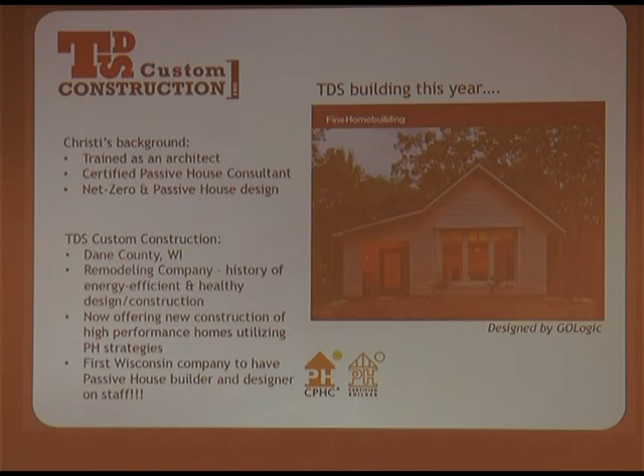So passive house, it's two things really. It's a standard for certification, but more importantly, it's a methodology, a set of strategies that when they come together make something really great.

But that's just about the standard, the certification, and how low you can get. The next part is the methodologies. It's really important to understand that this is an integrated system, that you can't sacrifice one for the sake of the other. You need to have all the parts and pieces operating together in order to get these really drastic energy use reductions.

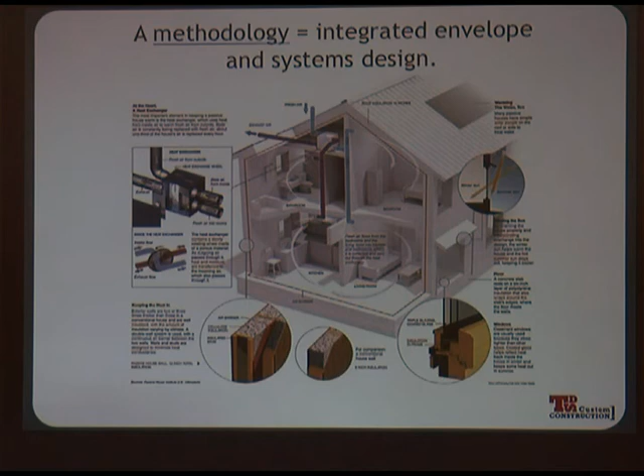First, I don't know how much people know. Has anyone heard about passive house before? Okay. I don't know if any of you have heard these misconceptions, but these are the ones I often get. People ask me at the first client meeting, can I have windows? Yes. Or windows that open? Yes.

So I like to run through these really quick just to put any of these myths aside. Too tight, that's the biggest one I get—I got it from a yoga teacher just yesterday. I'm always explaining that houses do need to be tight in order to conserve energy, but we inside those houses need to breathe, or any building for that matter. Her concern was mold and mildew issues. So what you have to do when you tighten up a house is introduce continuous ventilation into the house, and we're going to talk more about that later.

It doesn't work in my climate—that's not true. It works in any climate all around the world, from the hot, humid climate in China to the northern, really cold climates of Asia and Alaska. Is it the same thing as passive solar? It is not. We'll get more into that later.

That you have to use certain building materials—that's absolutely not true. You can use any of our standard construction building materials, or you can use alternative materials. It's not about telling you what materials you can use, it's about a way of building.

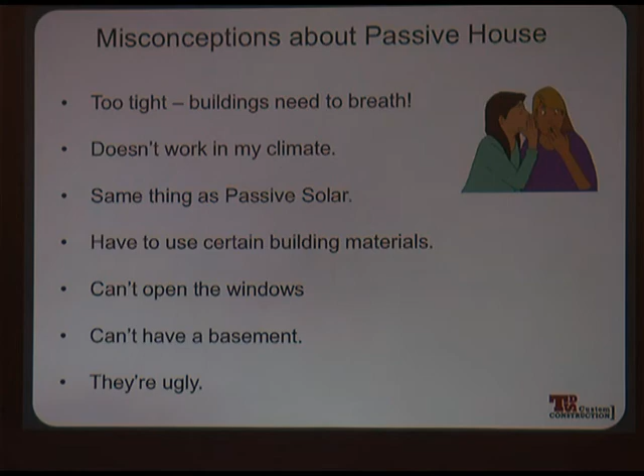I think a lot of the passive houses I've been seeing over the last decade or so are quite beautiful. They're not ugly. I think a lot of people think about passive solar and what was happening in the 70s and early 80s, and some of that stuff was a little bit kitschy—a little bit unappealing to the eye.

But nowadays we're seeing things that are much different. You can advance it—this is the kind of thing we're seeing. So it's really not unfamiliar at all, right? It's the kind of thing you'd see in any neighborhood, anywhere in the country.

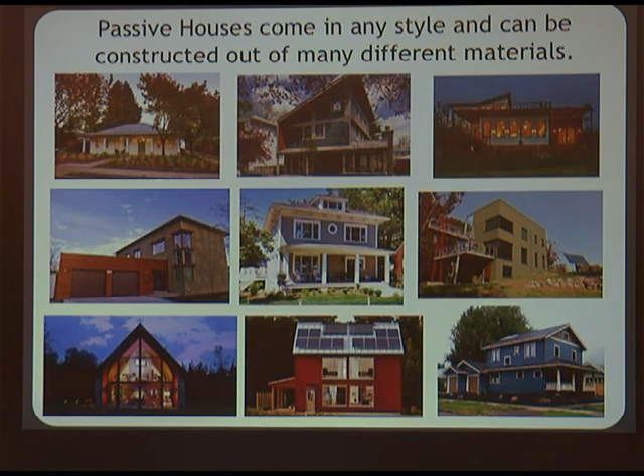And there's a lot of different styles. You kind of have a more contemporary one up in the upper right. You have maybe a southwestern style, although this is in Wisconsin right here, and then sort of more pared down, minimalistic things. Oh, that one is the southwest, the Wisconsin one's over there. And then very conventional styles. So it can be done in any style, so you don't have to be limited by that.

So the benefits—I like to go over these first, because if you have just one minute in an elevator with someone, this is like the elevator speech you want to give to convince people this is the way you want to build: vastly reduced utility bills.

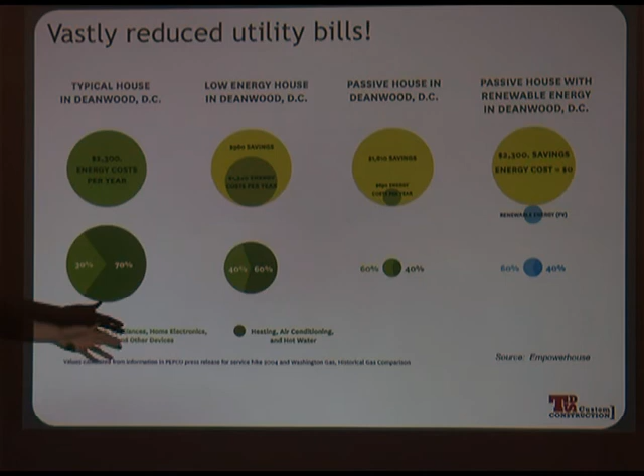I like this slide because this is an example of a house in the District of Columbia, but it could be anywhere in America. Typical energy costs here, what you'd get if you have what you might call a low energy home with really good upgrades, but not quite to the level of passive house. Much more energy savings and cost savings on that third line when you hit passive house.

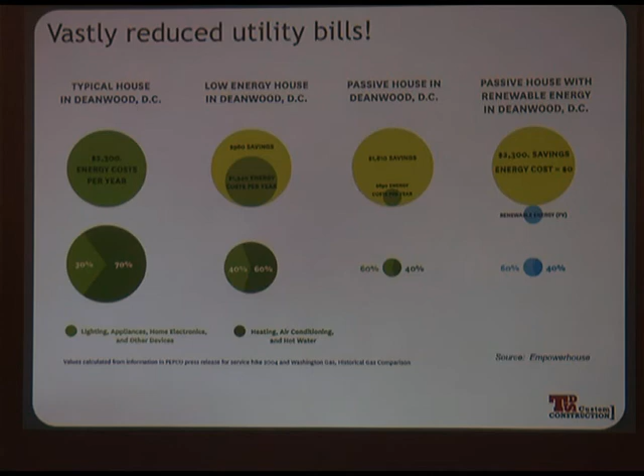And then when you add a small amount of renewables to a passive house, you're looking at net zero—you're looking at paying zero for your utility bills. We'll get a little bit more into that as well.

I have an old house that I would love to be able to upgrade at some point, but you put your hand on the wall in the middle of winter and it's cold. You don't put your bed next to an exterior wall because you don't want your back up against that. You don't have that in a passive house—all the exterior walls, when you touch them, feel good. They're not cold to the touch.

And because of that, you also don't get the drafts that you experience in your windows. You don't get all these cold spots, lots of condensation buildup. You're not seeing that kind of thing in a passive house, or something built to passive house standards. You're not getting the drastic temperature swings, because a passive house has such high amounts of insulation it can handle those extreme temperatures we're definitely experiencing here in Wisconsin.

The first net zero house I designed was in Minnesota, so very cold, climate zone 6, like here. And they didn't even have the heating system installed when they first were constructing it. I went in there and it just felt so amazingly good, and I was like, oh, you already have the heat turned on? And they said—even I was getting used to this idea of how different it was—they said no, we haven't even put it in, the heating system is in boxes in the garage.

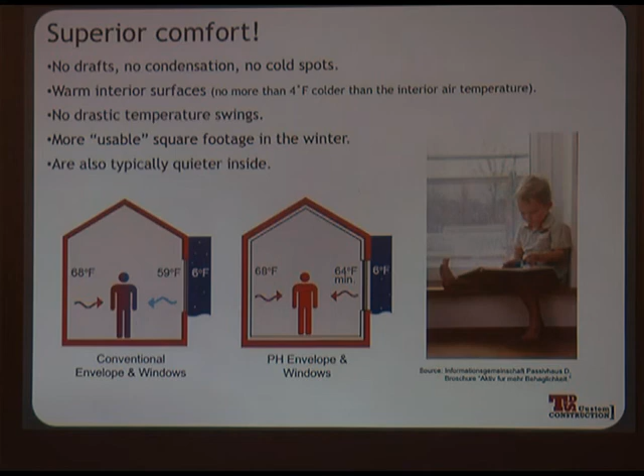Superior, healthy indoor air quality — this is what I was talking about before. We've tightened up the house, but we're inside of it and we need to breathe, we need fresh air. We don't want fresh air coming through all those cracks anymore, because that's kind of weird, dirty air. So we've tightened it up and made two holes in the house, one for in and one for out, and we have constant ventilation air. It's not blowing on you like a furnace does — usually that's high velocity and kind of uncomfortable. This is just a trickle of fresh air constantly coming into your home.

So you have reduced allergens, reduced pollutants, lower CO2 levels — there's a study, buildequinox.com, that's been doing a lot of research on indoor air quality and how it affects our cognition, our family life, our work life, how we're able to function, and our general health. If we're living in these spaces, it can really affect how well we operate day to day. A passive house will provide that quality of indoor air.

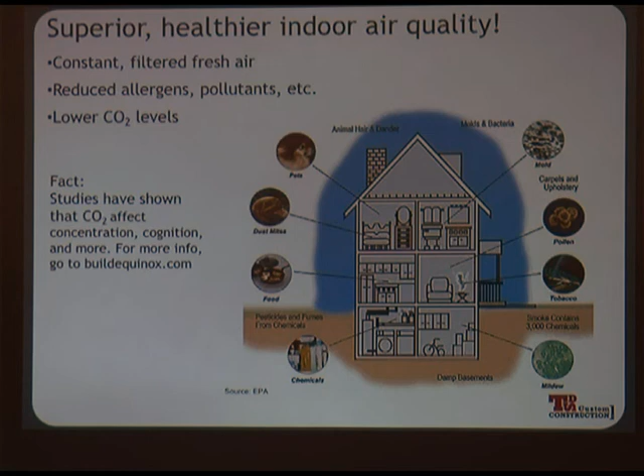Energy efficient homes have higher values. I think there still need to be more studies on this, but there are some out there showing that if you have an energy efficient home — maybe it's LEED certified or Energy Star — if it's better than the status quo and you can put that on the sell sheet when you put your house on the market, they sell for more money, and they also sell faster.

Okay, so let's talk about why we're here, why everybody is here — thinking about climate change. And where is Passive House and net zero in that context?

This is the latest research from the Energy Information Administration. There's tons and tons of data online that I completely got lost in last night, but this is the one you really want to know about. Buildings are responsible for around 40% — depending on the study, maybe even more — of our energy use and CO2 emissions. Of that, residential is about 21% of the total, so about half of what buildings use is residential. So it's not chump change — we can definitely have some impact here.

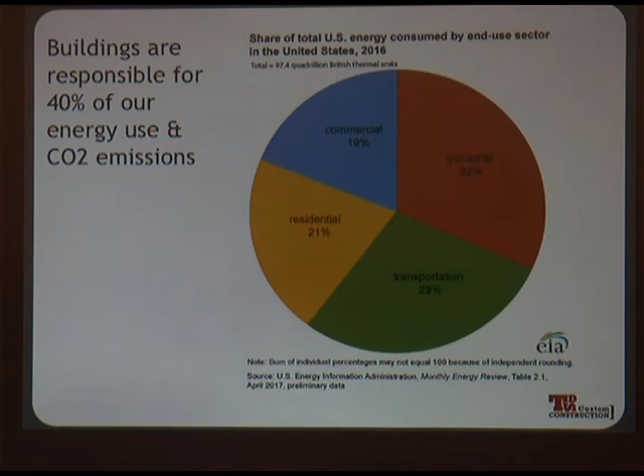The fact is that what they're projecting for our energy use, globally and in our country, the curve is amazing — it just keeps going up and up and up. We know that level of energy use is just not sustainable into the future. We've already gone so far, we have no idea where that arc is going to level out, or how that's going to affect us. So we need to really do something about this, and Passive House can be a major player in helping bring down that almost 40%.

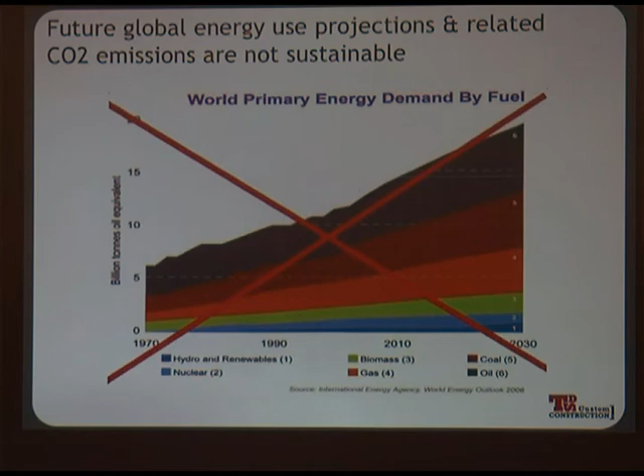So here it is — this is what they're projecting, our energy use going up and up and up. And showing all those different colors — not the red, but all the others — that's how they're projecting where we're getting our energy from into the future. You can see only a small part of that is going to be renewables. I mean, these are projections, but in order to close that gap, that red part — if we're using X amount of energy and we only have enough resources to supply this other amount — it's about closing that gap with conservation.

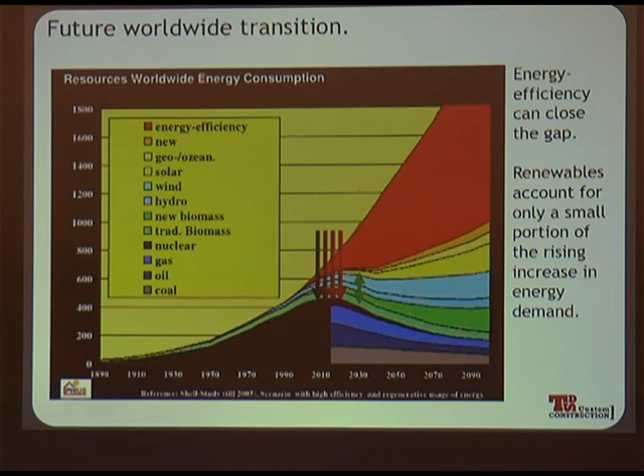And remember, that's what Passive House is all about — conserving energy first. That's going to be a recurring theme throughout my talk tonight. So since the energy crisis, this is what we're seeing.

We had a standard for energy, and all the codes have sort of stepped down incrementally, little bit by little bit over time. The newest energy code, well, it's actually not the newest anymore, but the 2012 IECC, which we're not on yet here in Wisconsin, that was a pretty big jump.

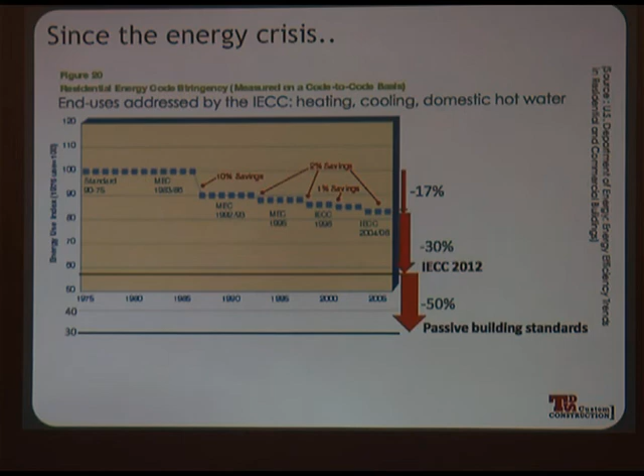So passive building standards are taking that next leap forward. I'd like to put this chart up here. I think this gives more context for people for understanding how this all fits together.

So the home energy rating system, it's the HERS rating. Has anyone ever heard of that? Okay, so if you ever sell your home and you have an Energy Star, or you've done a blower door test, or some rating for your house, that would be the HERS rating. There's a lot of people throughout the country trying to figure out how to get that listed on every sell sheet. Those are mostly real estate agents, lenders, and appraisers—that's a whole different topic of conversation. But the HERS rating basically compares your house, or any house in question, to 100, which represents current code. So what we have here is, you know, my house maybe is up here.

I don't know, I'd like to change that. 100 is code, and then it steps down from there. So you've heard of Energy Star, heard of Green Built Home probably. You've heard of LEED. 2030 Challenge is another thing, and there's all these targets. You can see how much further down Passive House will put you. Zero is that place where you've achieved net zero energy.

So it's just another way of looking at this, just to impress upon you that the Passive House strategies are achieving deep energy reductions. Not just a little bit, not just cherry picking, but we're going all the way, or as far as we can go, with conservation strategies.

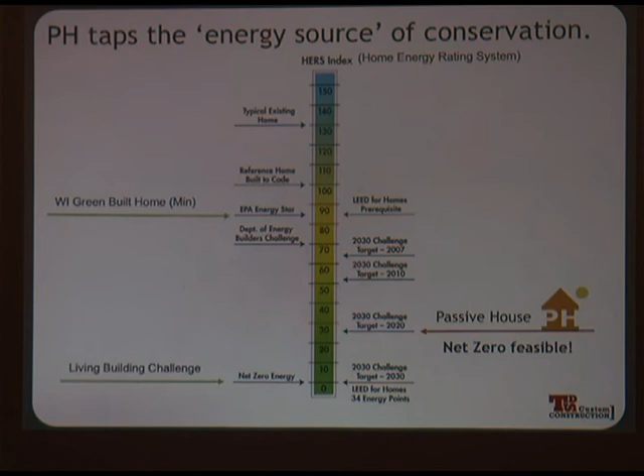Brief history of Passive House. We're gonna have a history lesson, I'm sorry. You have to know where this has come from, because there's sort of a sense of pride, for me anyway.

Passive House actually has its roots in the US and in Canada. Most people think of it as something imported from Germany, but all of the research started right here, actually, in the upper Midwest and in Canada. It was in response to the energy crisis in the 1970s that all of this research came about.

So things like super insulation, increasing air tightness, even some of this passive solar stuff, ERVs—energy recovery ventilation, which we'll get more into—all of that kind of stuff came out of research that was done here. I have to say, it was at the University of Illinois, my alma mater. Oh, I didn't realize that part.

But then a lot of those ideas sort of went by the wayside. Political climate changed, economic climate changed, a lot of different things changed in the 80s, and some of these ideas were forgotten. There are definitely some people who never forgot these ideas, and now we're seeing a resurgence of looking at these things because climate change has become such an issue, and it's really obvious and apparent.

But in the meantime, this guy, Wolfgang Feist, got a hold of these ideas, and he said, what a good idea, Germany could really utilize these ideas. What can we do with this research, and what can we do to really reduce the energy consumption of our houses in Germany? So they developed what is called Passive House.

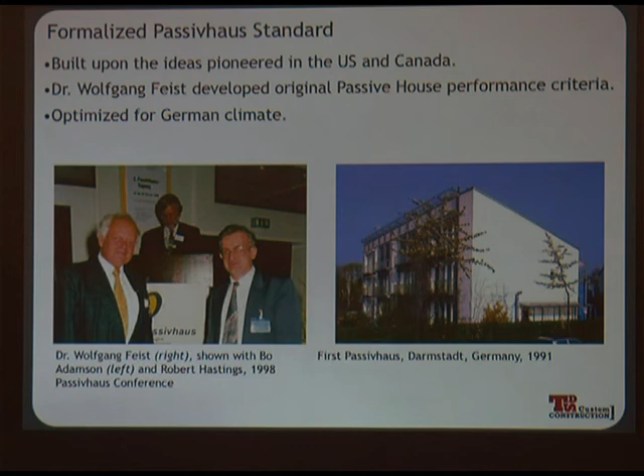So it came back to the US. We have several bodies of certification here, well, two, I should say. The Passive House Institute in Germany is still certifying globally, but what I prefer is Passive House Institute US, because they're really on the ground here working very hard to make this come to fruition in our country.

And they're tailoring it for our country. They're working with the Department of Energy. They're working with other key players in the building science community. They are doing things like working with manufacturers to get more and better doors and windows available to us, working with ERV manufacturers to improve technology. So they're really on the ground trying to figure these things out.

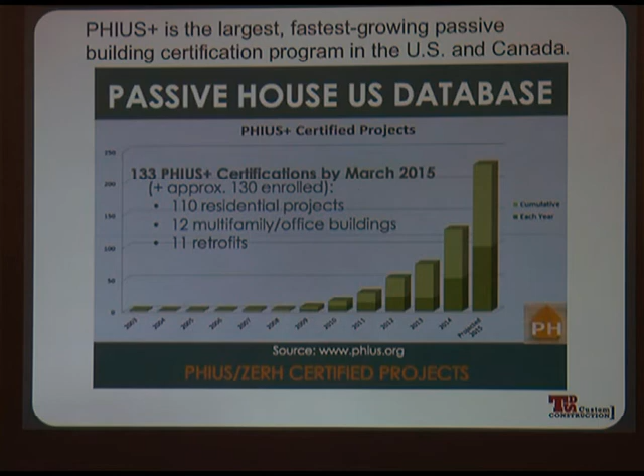And it's growing very, very fast. They've seen a huge increase over the past several years. You can kind of see that curve going up of residential, single-family residential, but now multifamily residential people are catching wind of this.

I mentioned the partnership with the US Department of Energy. I think this was so key and so great for Passive House Institute US to do. The Department of Energy regulates Energy Star and the Building America program, and now you may know about the Zero Energy Ready Home, which is also a really great program. Basically, it's getting you to fairly deep energy reductions, but not quite to zero. With a small amount of renewables, you can get to zero, but it's still not quite the deep energy reductions you're getting with Passive House. So they've created this partnership, and the Department of Energy sees this as the next REACH standard. They're on the Zero Energy Ready Home now, but they see Passive House as being our future.

Okay, so let's get into the methodologies. It's a conservation approach. It's about reducing your loads first and maximizing your gains. So minimize losses, maximize gains. That's the tenet of Passive House.

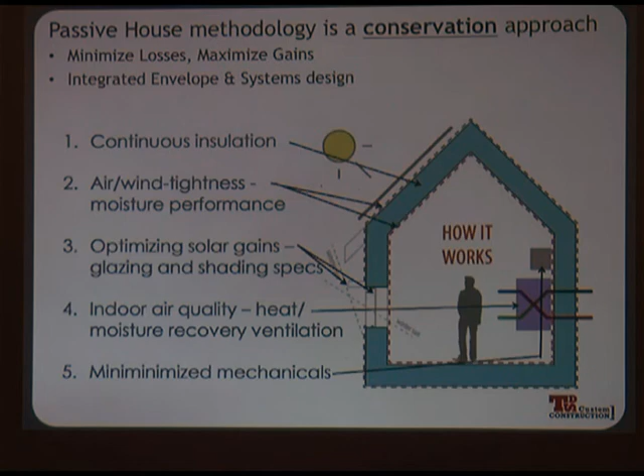Before you put in any fancy technology, before you're looking at renewables, you're talking about a house, and I think this is how I frame the whole idea of passive, that it just passively resists the weather. There's not a whole lot of active technology until you start adding things like PV. So the 5 basic strategies working together as a passive house: continuous insulation, high level of air tightness, optimizing solar gains—that's the passive solar strategy—energy recovery ventilation, and small loads, small mechanical systems.

Just to help you through this, because people will ask—oh, I work with passive house—and they're like, oh yeah, passive solar, cool. And I'm like, yeah, but it's not quite the same thing. Passive solar was all about mass and glass, which isn't aesthetically appealing to most of us nowadays. It was sort of a way of the past, but the reason it got that way is because it was all about having a lot of concrete or something massive inside to absorb heat, and then a lot of glass to let that heat in. Really what happened was you got big temperature swings—overheating during the summer or even spring and fall. You'd have all this heat loss through the windows because we just didn't have the windows then that we have now.

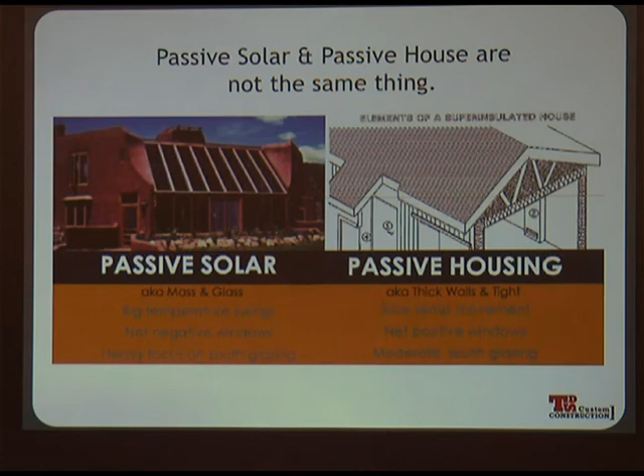Passive house versus passive solar is different. You don't see the levels of windows on a passive house that you would in passive solar. There's that slow temperature movement, so you're not getting big drastic temperature swings. You're not losing lots of heat, you're not gaining tons of heat. It's more balanced.

Okay, so let's talk about continuous insulation and the thermal envelope. When you think about continuous insulation, I like to think about it in terms of nature—we can learn a lot from nature. So there's this bird, just walking around, they're fine, it's summer, they're comfortable. But they have a layer of down all around their body that when it gets colder and colder, they're able to pull into, and their body is completely surrounded, with no gaps in this insulation that they carry around with them. That's what we want to do to our buildings.

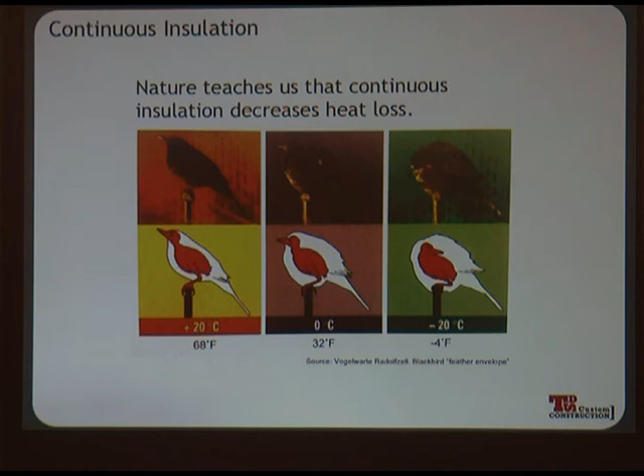Not a bird, but same concept. You should be able to take a pencil—if you cut a section through your building, cutting it in half and looking at it from the side—you should be able to draw all the way around the building without picking up your pencil where that continuous layer of insulation is. If you have to pick up your pencil, then you know that's a detail you have to look at, a problem you have to solve.

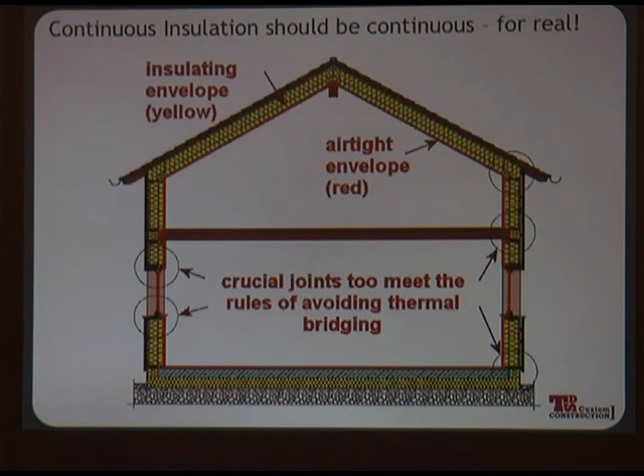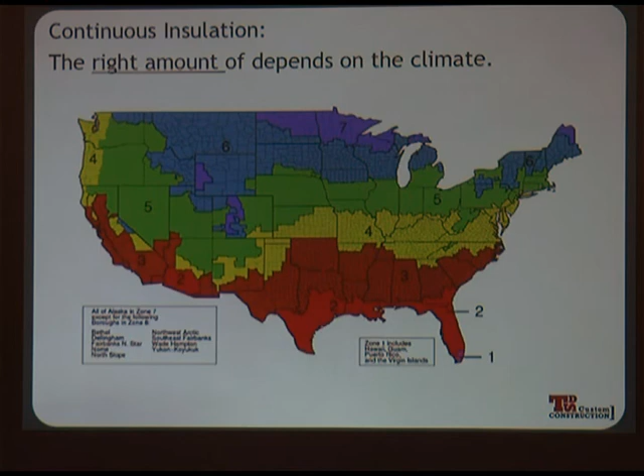I think we'll just zip through this one. So what is the right amount of continuous insulation? Because you actually want quite a bit—more than what we have—but what is that? It really depends on the climate, and on your energy balance. We use energy modeling software to figure out what the ideal is, both in terms of cost optimization and in terms of what's best for the climate.

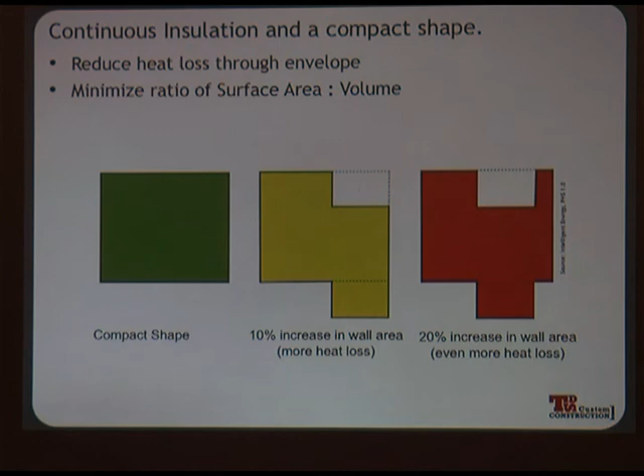What has become very apparent over the last 30 years of research is that a compact shape is usually best. So this square, right? The more convoluted you get, having corners taken away or courtyards and things like that, the more heat loss you're going to have through your envelope. So that makes for maybe a kind of a boring looking building, but we're going to discuss later how you can take advantage of things like shading to sort of articulate the facade a little bit more and make it more interesting.

A key part of continuous insulation is eliminating thermal bridges. Do people know what thermal bridges are? Okay, so you two have all the answers. So basically, it's something in the wall or the floor or the roof that's conducting heat through the assembly of the building.

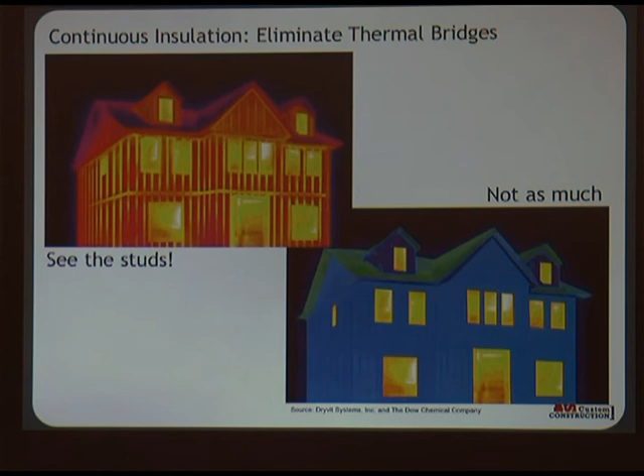We don't want that. We want continuous insulation. So this building was actually retrofitted, not to passive house levels, because you can still see the studs sort of projecting through on the lower right. But just by adding some continuous insulation on the outside of the building, you've drastically reduced thermal bridging and you've drastically reduced your heat loss through the envelope.

Can you go back one, actually? So I just want to mention that when you have a thermal bridge, especially in houses like this, you have the tendency to create mold issues, because that stud or that thing projecting through your envelope can get really cold. Then you can have the warm moist air of the inside of the building hitting that, and condensation occurs. Many of you at some point in your life have seen this on windows. So if you have a wood window and there's condensation on it, the window starts to rot or decay or do things that you don't want. Well, this can happen in any part of our building assembly. So that's another reason why thermal bridging is so important to eliminate.

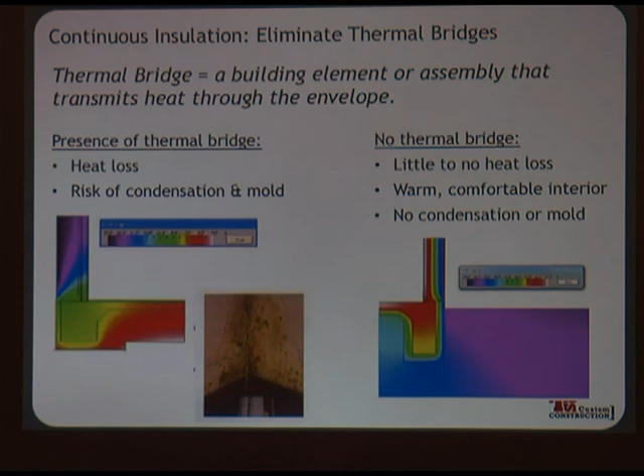You can go to then. Let's see, what am I meaning to say here? So the foundation connection is usually the trickiest. It's that place where you have this highly conductive concrete meeting other parts of the building, and you really have to think through how this is going to be detailed and how you're going to eliminate the thermal bridges. So this is just one of many, many, many solutions to this problem.

I've seen a lot of passive houses throughout the country that have said, we're okay without a basement, we're just going to have a root cellar underneath our connected garage or whatever that may be. And they'll do this bathtub foundation. In this case, it's a little bit different, but it's basically insulation that's wrapped up on the outside, goes underneath the concrete slab, and then comes up again on the other side. That's probably the simplest way to reduce thermal bridges, but I'm aware that we live in tornado country. I've never personally designed a house this way, but just know that's probably the most complicated detail there, where the foundation meets the wall.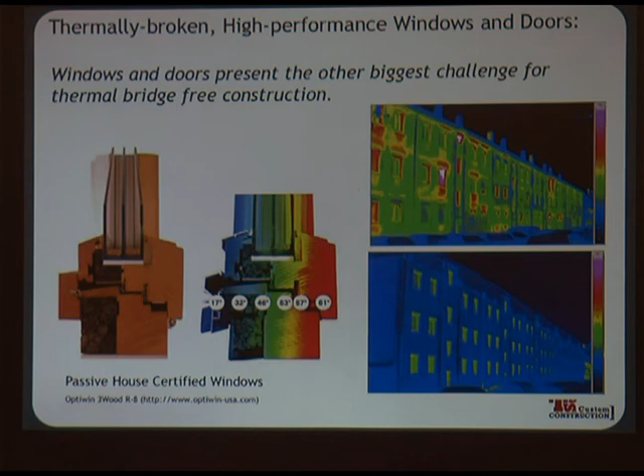The other thing to watch out for is solar heat gain coefficient. In the past several years, the incentives for buying windows that were Energy Star certified mistakenly and unfortunately were really focused on the South. You want to reduce your solar heat gain coefficient, which is how much heat is getting into your building. So if you have a 0.5 solar heat gain coefficient, that means 50% of the sun's radiation is getting into your building through your windows. That's about where we want to be for this climate. But all of those certified windows we were getting tax credits for were looking at much lower solar heat gain coefficients, which makes sense, because in the South, you don't want that coming into your house at all, since it's hot and you want to keep it cool.

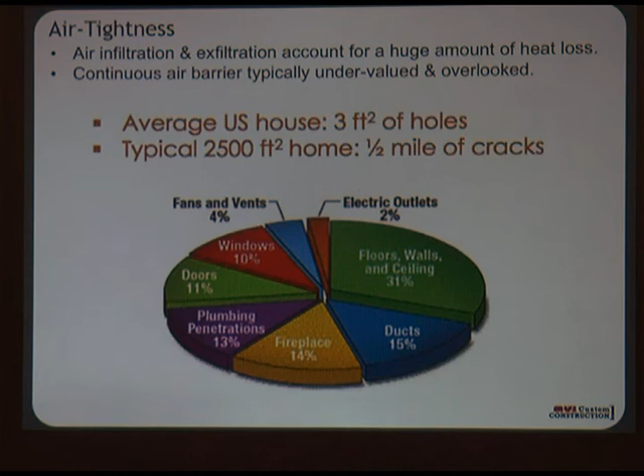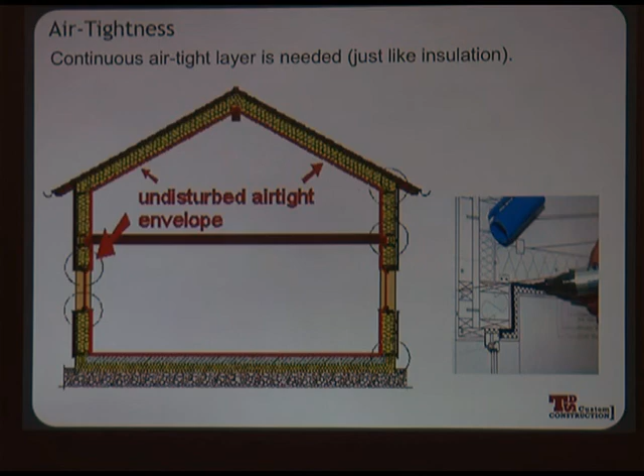Continuous air barriers are typically overlooked. So just like with that thermal envelope, you want to be able to put your pencil down on a piece of paper and draw where your air barrier is. If you have gaps and you have to pick up your pencil, then you know you have an issue you have to look at. I know I sound like a broken record, but these two things are so incredibly key to the performance of a house like this.

Air tightness, yet again, as we talked about with thermal bridging, can happen the same way: moist, warm air starts to travel through your wall and hits cold surfaces. You can have risk of condensation and mold, which you do not want, because that's sick building syndrome. The occupants inside can get very sick as well.

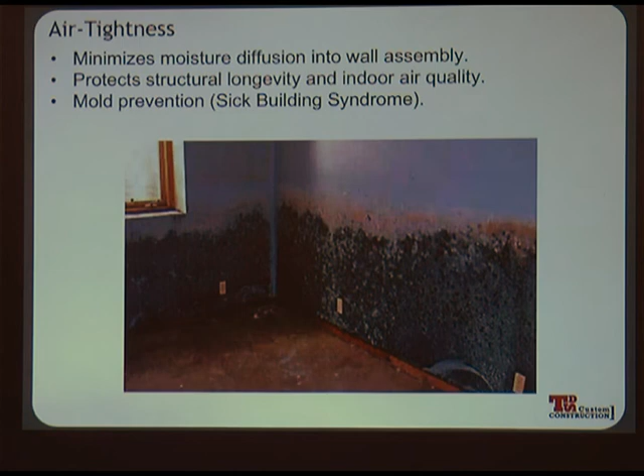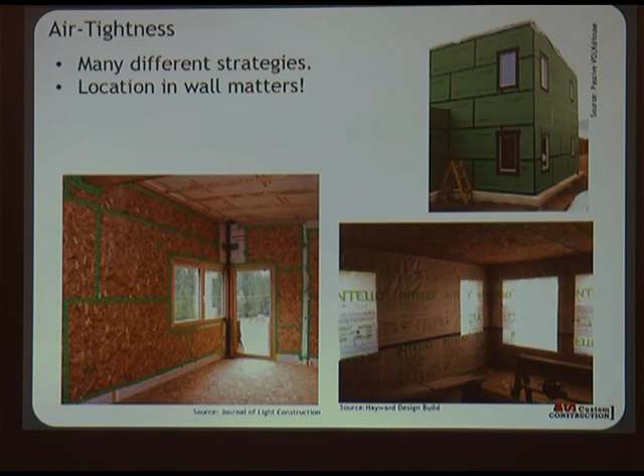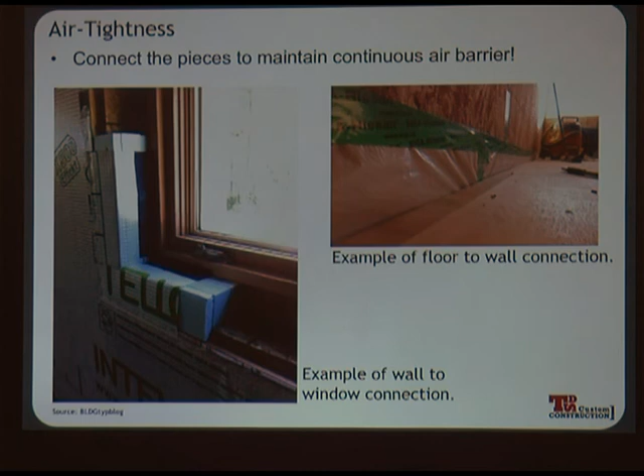It's really important to look at all the different connections. The crucial ones are where the foundation or the floor meets the wall, and where the airtight layer meets the window. We know our windows are airtight—we just looked at that—and we know our wall is airtight—we just looked at that. So how do you connect them? This is one example an architect came up with: wrapping this membrane up and connecting it to the window frame, so that key area where you're always having leaks and drafts around the frame of the window is now sealed up tight.

At the first net zero house I designed, they did the blower door test and they were bummed because it really wasn't very good. They thought it would be much better. Their goal was 0.6, but they were coming in at like 1 or 2, and they weren't meeting their goal. Then they realized it was one vent they didn't seal up, and they sealed it and got their goal. Actually, they got to 0.3 for air tightness. So it's really important to seal up all these penetrations. Even one little hole in this envelope that you've done such a good job sealing up can make such a big difference.

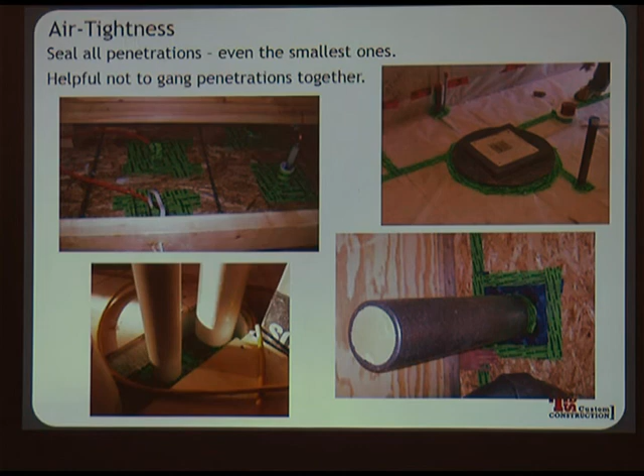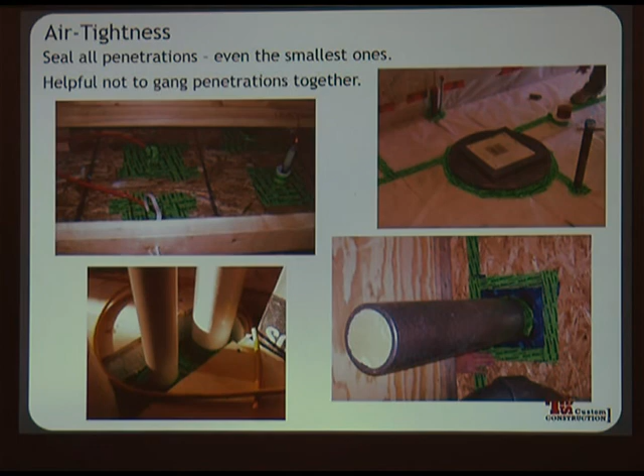I put this slide up here to think about being creative. Think about what you can do to maintain your air tightness into the future.

This is one method I've used in the past. So we have this great wall system, and let's say we put the line set for our mini split heat pump through here. Let's say you have to replace it, because inevitably you will—mechanical stuff breaks. I don't know if it'll be 10, 20, or 30 years, but it will break, and then you're going to have to replace it. So what do you do about that? Are you going to rip that out of the wall? And as you're ripping it out, what are you doing to your airtight layer and your insulation layer?

So the system we came up with in this case was to put a PVC sleeve through the wall and run all the line set through it. Actually, the builder liked it so much he started using it all over the place for pretty much everything. You run that through, and then you can fill it with spray foam, which is sacrificial. So later, if you need to change that wiring or line set, you chip out the spray foam with some effort, but you're not interrupting your continuous insulation or your airtight layer.

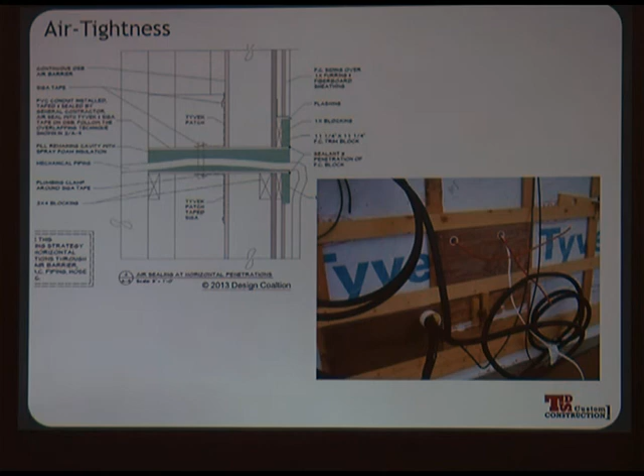And that's just one solution, right? So I'm just encouraging people to start thinking through all this stuff, because there are a lot of details that go into creating a house like this.

It's really important to educate all the people that are going to touch the site, that are going to be on the site. You need to communicate the goals to them—this is what we're trying to do, we're trying to achieve this level of airtightness, and here's how we're going to do it. So it's important, as you're interacting with this, not to just rip big holes in it. Think it through so that everybody understands and is on board.

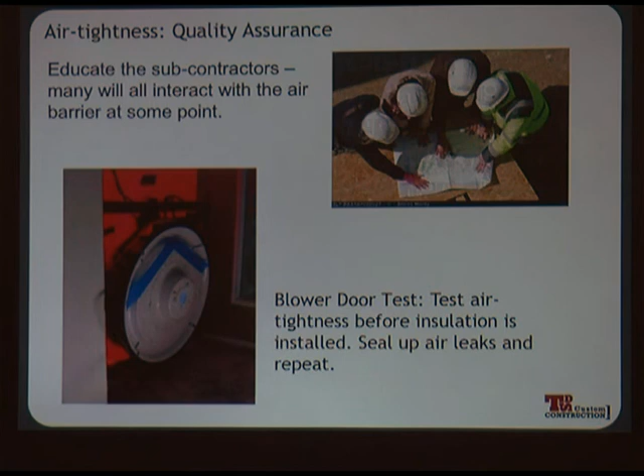A blower door test—does anyone know about blower door tests? Basically, that's your way of testing the house to see how airtight it is. You can do everything you want to tighten up the house, but if you don't test it, you really don't know. We recommend testing it after the doors and windows are in and all the framing's up, but before putting insulation in, because that's your chance to seal up any cracks and things like that. Then you want to test it again at the end, just so you see how good you've done, and you can celebrate and have a beer or something.

So now we'll talk about solar gains. So what is the right amount of solar?

We saw in passive solar that those buildings tended to overheat. They weren't quite a greenhouse, but we wouldn't want to live in a greenhouse for a variety of reasons. Also, you look at that and it's like, well, that's a total missed opportunity. There's no windows in that house and no way of taking advantage of the sun's totally free heat to heat your house.

So it's somewhere in the middle. Usually it's mostly on the south side and less on the north. Of course, we always run into situations where my client has a lot and all their beautiful views are to the north. So now what do you do?

The beauty of passive house is that it's not just relying on passive solar, using the sun to heat your house. It's about an energy balance. So if you do have that situation, maybe you're increasing the size of your windows on the north side, but you're balancing that out with maybe a little bit more insulation or doing a better job in air tightness or things like that.

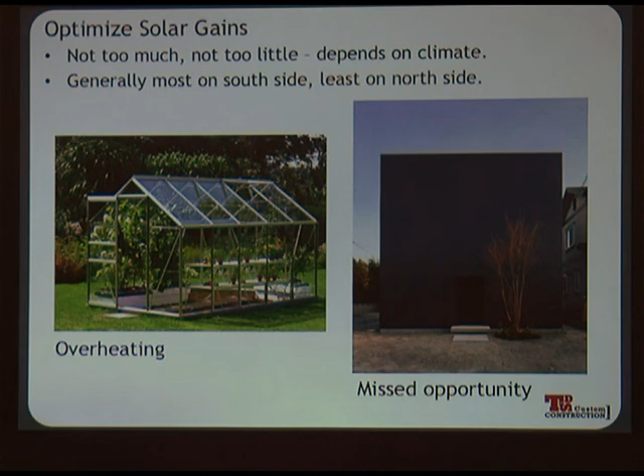Building orientation is key. If you're looking for a new site to build on, look for one where you can put the house on that site and take advantage of the sun's heat coming from the south. Also remember to consider adjacent trees and things. Those trees can be nice in summer as shade if they're deciduous, but if you have evergreen trees and you're not able to get any solar into your house in the middle of winter, that's kind of what you don't want. So think about that kind of stuff.

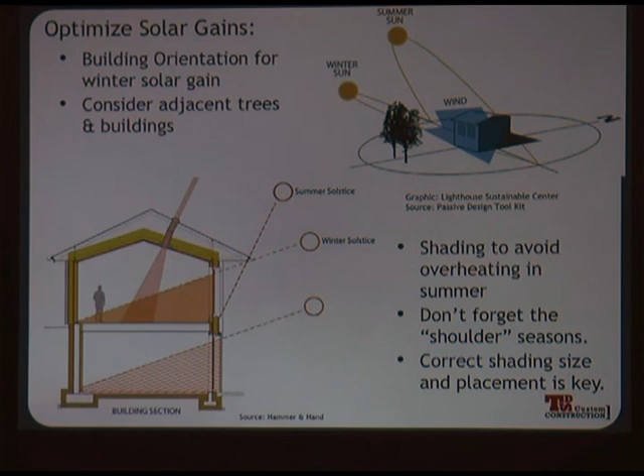Shading is really, really important. As you all know, the angle of the sun changes. In the winter, it's coming in low, so that heat gets into your house, and it's really great. Then in the summer, as the sun is at a higher or steeper angle, you can take advantage of that by having shading devices, because you don't want that heat in your house in the summer.

So there's a lot of different ways to do this. Remember when I talked about the box, and you're like, oh, that's the most efficient, I guess I'm just going to live in a box? Well, you don't have to. You can utilize shading elements to really articulate the facade, provide visual interest in the facade. You don't have to have a bunch of undulating crazy forms. You can utilize shading. There's tons of different ways to do this.

These people wanted a really modern look, so they got these sliding panels that they can operate. I'm assuming they're on some sort of electric switch, or maybe they're photosensitive. This is what we did in the Root River house, just having shading elements, either the roof overhang or this canopy down below.

This is not a passive house on the upper right, but it's a modern version of a traditional house. They really had it figured out. When you had deep porches, like houses from the early 1900s, having deep porches wasn't just to have a porch, or having deep overhangs wasn't just to have an overhang. It wasn't all aesthetics. It was about keeping the sun out of the house in the middle of summer.

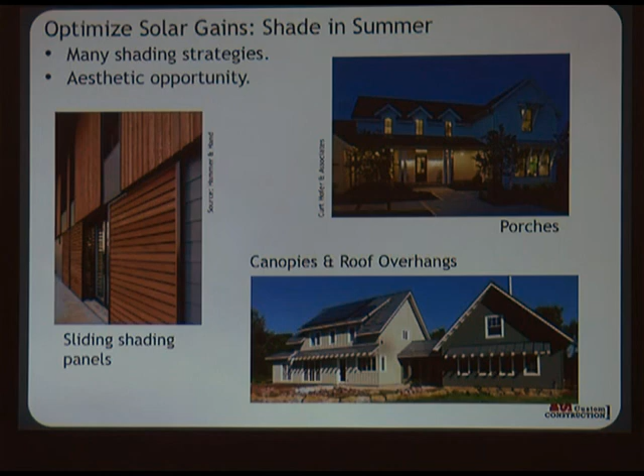We talked a little bit about solar heat gain coefficient. So looking at that, actually geeking out a little bit and looking at the specs of your windows, making sure that you have a higher solar heat gain coefficient, because if you have a really low one, you're not going to be able to take advantage of the sun.

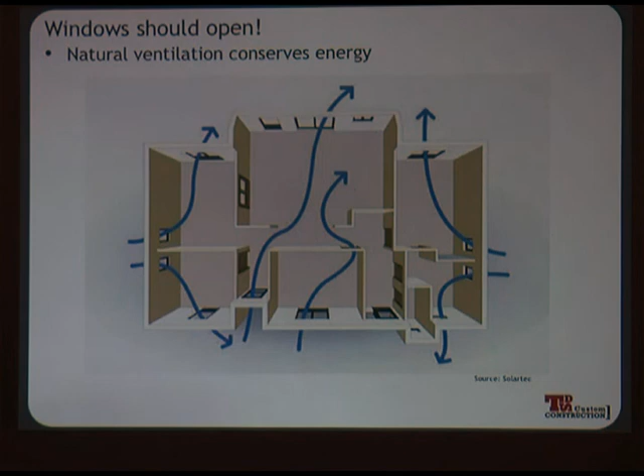And then I think windows definitely should open. I'm so frustrated whenever I'm in a commercial building and it's completely sealed off. You're not allowed to even think about the outside or have any interaction with it, and no fresh air whatsoever. You have no control. In a passive house, you should definitely have operable windows so that you can take advantage of that natural cross ventilation.

Okay, we'll talk about mechanical systems and appliances a little bit. This is probably the toughest thing about passive houses. The loads, the heating and cooling loads, are now so tiny because we've done such a good job on the thermal envelope that we don't always have the greatest options for heating and cooling.

In Germany, they optimized the standard so that you could actually drop the mechanical system out completely, which has both cost savings and convenience. But here in really, really cold Wisconsin, we still need a little bit of heat. I mean, we could insulate and insulate and insulate to like three feet deep, but that really wouldn't make a lot of sense.

So we still do need a little bit of heat, but not nearly as much as what you'd see with a standard house with a conventional forced air furnace. So often what we'll see around the country are what are called mini split heat pumps.

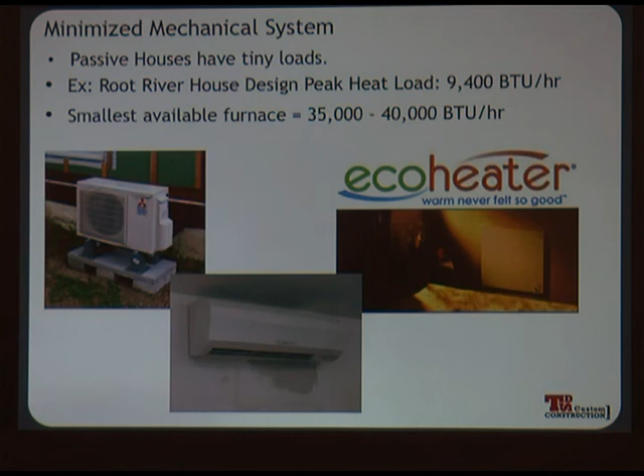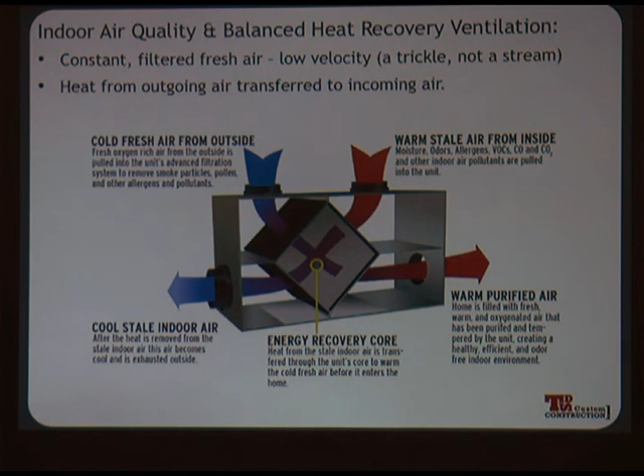And then you need an energy recovery ventilator. I'm guessing you've heard of that. Basically how it works is you're harvesting the heat that's leaving the house instead of just throwing it away. You've done such hard work to bring the sun's heat in, or maybe you have a little bit of mechanical heat you've been holding onto so hard that you don't want to just throw it out. But you still need ventilation, you still need fresh air. So the energy recovery ventilator helps with that. The air leaving the house has heat in it, and that air goes, but you capture the heat and transfer it into the incoming air, so you're looking at anywhere from 82 to 95% efficiency on good models. So all of that heat, you're not just throwing out, you're recovering it.

Go ahead. This is one of those misconceptions, right?

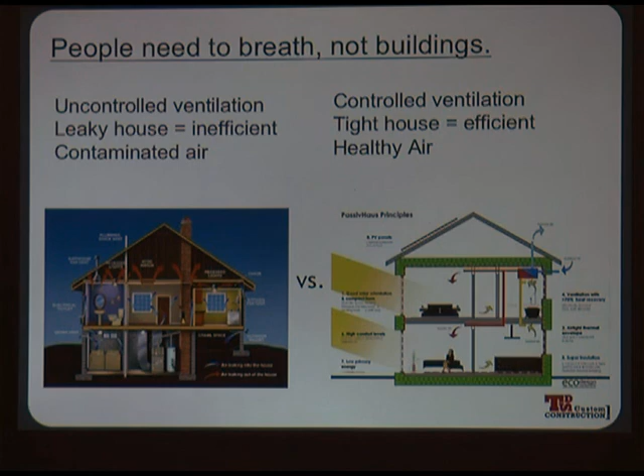People need to breathe. The truth is that people need to breathe, buildings don't necessarily need to breathe. So the idea, I think I covered this already, is that you want controlled ventilation. You don't want ventilation air coming in through cracks and things like that. You want filtered air, not air coming through your walls where you're not really sure what quality it is.

Typically in a passive house, you're supplying air to living spaces and exhausting from kitchens and baths, but I think that's changing a little bit. That's usually what they like to see, but oftentimes I'm finding that's not always the best solution, and that's a deeper conversation we can get into if anyone's interested. But that's typically what you see.

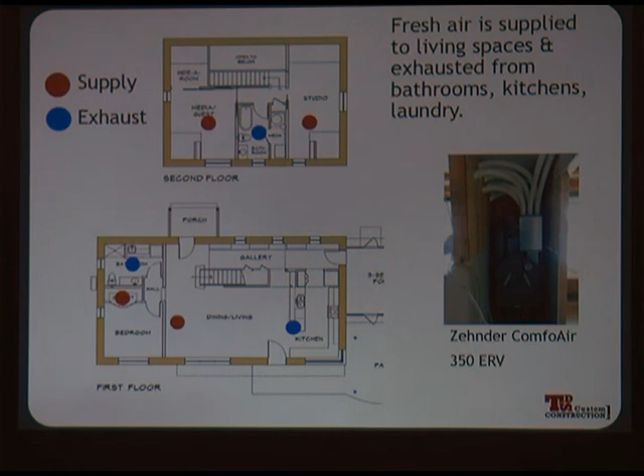These ducts are typically really small. This is the Zehnder system, for example, and that's a plug-and-play system. It's really easy, you don't necessarily even have to have an HVAC contractor install it. The builder has installed it in the last 2 houses I've worked on, and because they're so small and flexible, they can go in 2x4 walls. You don't need to think too much about where the duct runs are going to go. You still have to think it through, but it's not as big a deal as a furnace system where you have these big ducts running through your house.

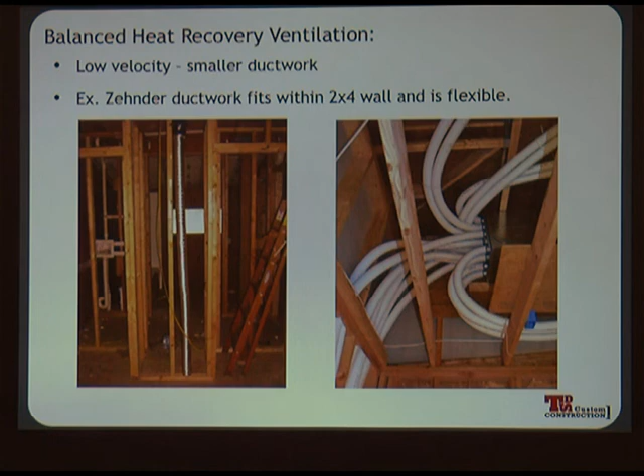Okay, I want to talk a little bit about appliances because there are some considerations.

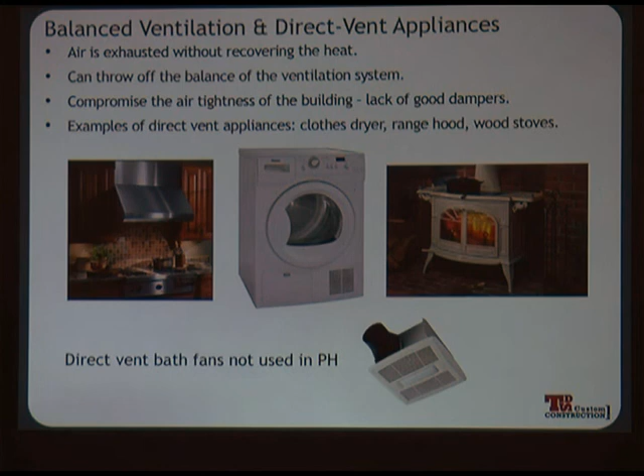When you have a dryer that's vented to the outside, or a hood over your stove that's directly vented to the outside, as 2 examples, all that air is leaving the house and it's not being recovered because it's not going through your energy recovery ventilator. So you're just basically throwing away your heat. What do you do about that? Usually, bath fans are one example, but those can be easily tied into your energy recovery ventilation system, so that's not as much of a concern. It's these other things that you see up here that are.

Let's move forward. So a clothes dryer, there's a lot of different options for how to handle that. One, you could have a condensing dryer, which doesn't need ventilation directly to the outside. I've actually had it moved outside the main thermal envelope before, into a small room that's the mud room slash laundry room. You have your dryer in there, and it's venting to the outside, but you're not affecting the energy balance of your house, the balance of the ERV.

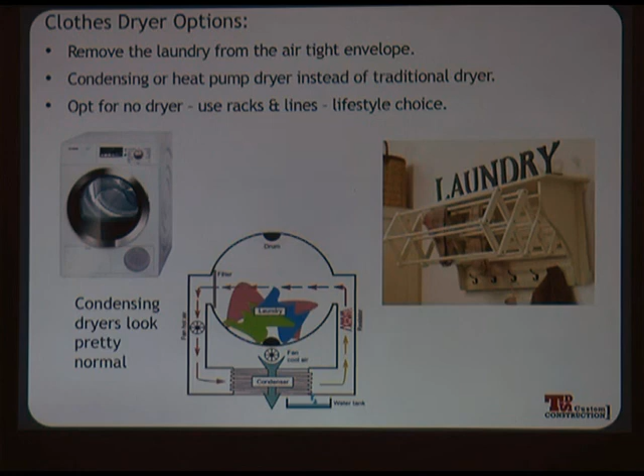Some people like line drying, so in your design of your house, you can incorporate line drying into that. There's a couple different ways of handling it, but my main point is that you need to think about it, because that heat is leaving the house and you're not recovering it if you just have a conventional direct vent dryer.

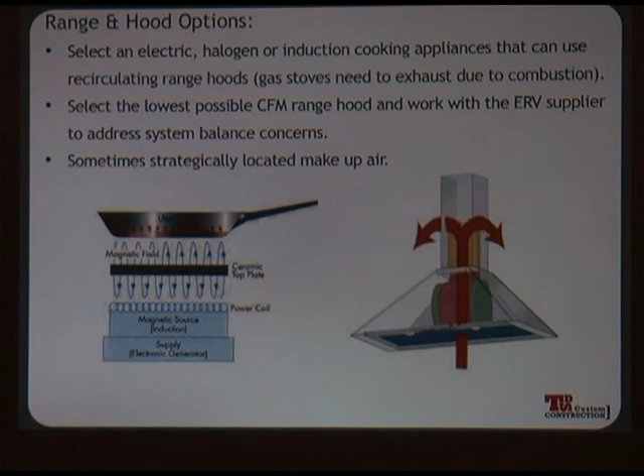Same thing with the range hood. For people who cook with gas and really love gas, I would never not have a range hood that direct vents to the outside. In that case, you'd have to have some sort of makeup air - again, a deeper conversation there. But if you go with something like an electric stove or induction, you could probably get away with just a recirculating hood, and then you're not throwing all that heat away. So again, something else to consider when you're designing your house.

Wood stoves - the loads in these houses are so tiny, so you want to be really careful when thinking about wood stoves. That's not to say it can't be done. There's a woman in the Duluth area named Rachel Wagner who puts wood stoves in every single house she designs and builds because they love them. And I totally understand that - there's something about the fire in the hearth. But there are special considerations.

You never want to burn it too hot because you're going to overheat, and you definitely want to have some sort of makeup air. A lot of people have ultra-tight houses that put wood stoves in, and they can't get them lit, so then you have to go back in and figure out how to bring in enough air to get a draw on it. Another way - Sonia Newenhouse has a passive house in Viroqua.

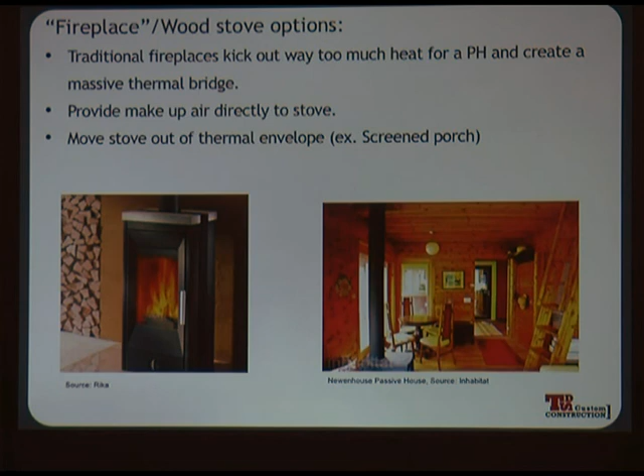Okay, let's talk a little bit about costs. I prepared some information - we can go ahead, Verge, thanks.

Really, there's more research needed on it. It really depends on the decisions you make, and it depends on what you're comparing your passive house to. Your experience, Verge, has been about 2%, right? You can't compare a passive house with granite countertop finishes to a house that has builder finishes - you can't do that. So you have to make sure you have your apples lined up and don't have any oranges in there.

It also depends on how fancy you get with your systems. A passive house is about conservation strategies, so you should be putting in the simplest system you can find. Some people really like lots of technology - there are people out there that really get into that - so that's going to increase your costs as well. But the key is in the beginning, integrating all the parts and pieces together and considering cost as you move along. These ideas are not things you can just apply at the end.

I've been a LEED consultant in the past, and I've had clients call me when they're about to start construction, saying 'oh yeah, we want to do a LEED building, can you help us?' And it's really too late. The same concept applies here. If you're thinking about going this route, start at the beginning. If you're going to build new and you're looking for land, start thinking about that from the minute you start looking at real estate listings.

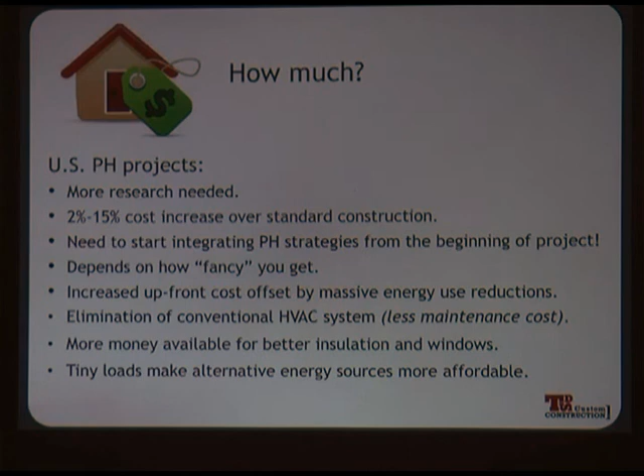The other thing to remember is that even though you have increased upfront costs - maybe it's 2%, maybe it's 15%, maybe it's typical - if you have increased upfront costs, you're going to recoup that over time because your energy bills are going to be so much lower. Okay, so here is just a comparison that I did.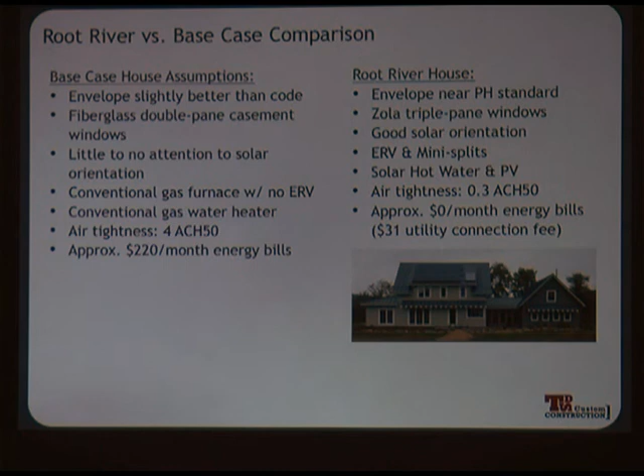Maybe 220 in utility bills, compared to the net zero house on the right, which is built to passive house standards. Much better windows, good solar orientation, the ERV and mini splits as compared to the gas furnace, the solar hot water as compared to the gas water heater. That was an all-electric house, great air tightness. They don't pay for energy.

Okay, now we go. This is how I like to think about it. People always talk about return on investment, but that to me is just a little bit of a wonky way to think about it because it's not really addressing what your monthly cash flow is. And that's really, to me, what people care about - like, can I afford it now? Can I afford it this year, next month, or next year, into the future? Does this really make sense for me with the resources I have available to me now?

So I would argue that it does. The total construction cost of the base case house would have been $338,000, while theirs adding $45,000 would have been $383,000. So I'm looking at just typical financing - 20% down payment, the rest financed with a mortgage, a 30-year mortgage, that's what most of us do, 4.25% interest rate, it's actually high for right now. And then you look at this fourth line here and what you would pay monthly for your mortgage. Okay, so certainly the Root River House owners are paying a little bit more for their mortgage.

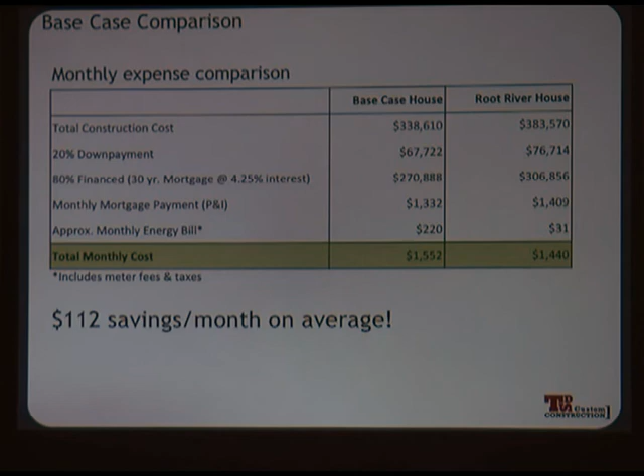Okay, so if anyone is interested in getting certified, I'm just going to quickly run through this. Go ahead - are we okay on time?

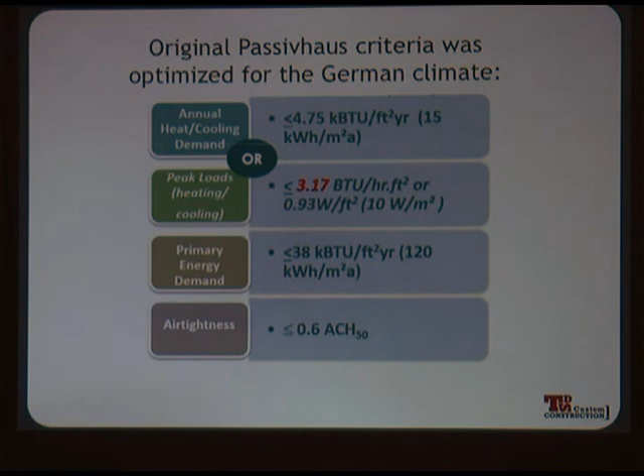The original passive house criteria by that German guy, the Passive House Institute in Germany, that was made for Germany. Germany is more like Southern Illinois in terms of climate. The Passive House Institute actually has done this thing where they've gotten climate-specific criteria for certification, and they've done this for the entire world. So, like, I went on a tour in Chicago, and there's all of these people from China coming over and really learning so much from the way that we're doing things here, because we are looking at not just one climate, a tiny little country in the middle of Europe. We're looking at a whole broad array of climates, everything from Florida up to Alaska.

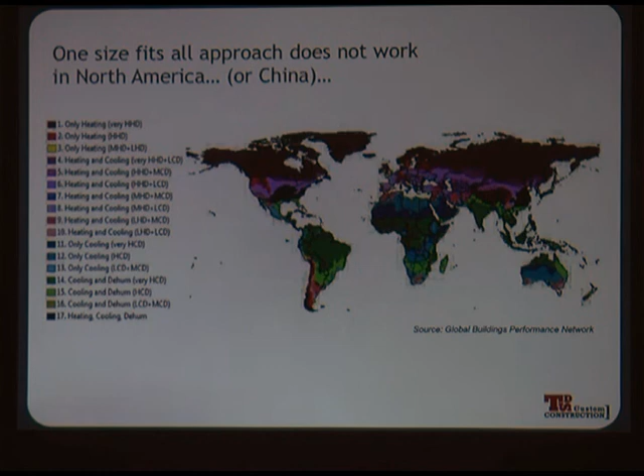So the criteria has changed, but the methodologies have not - still the same strategies, and we no longer have the one-size-fits-all approach. Here are the main problems: in colder climates, the old criteria were not cost optimal, which meant that, like in that Root River house, trying to get certification, we put 17 inches of insulation in that thing. I think that was going too far. It didn't really make sense when you looked at it in terms of the energy model, but we were trying to meet this old German criteria.

I haven't tested it against the new criteria, but that's one of their goals: to make more sense economically for colder climates. There was also a tendency toward overheating in our climates because in their desperate attempt to meet this arbitrary criteria from Germany, we were making really big windows and then getting too much solar gain.

In warmer climates it was way too easy, so people were leaving cost-feasible savings on the table, and they've tightened that up. The air tightness standard used to be based on square foot of floor area versus square foot of building envelope, which meant a really large house was allowed to be leakier than a small building. If you're being conservative and building just what you need, say 1,000 or 1,500 square feet, it was actually harder to hit that air tightness standard than for a 5,000 square foot house.

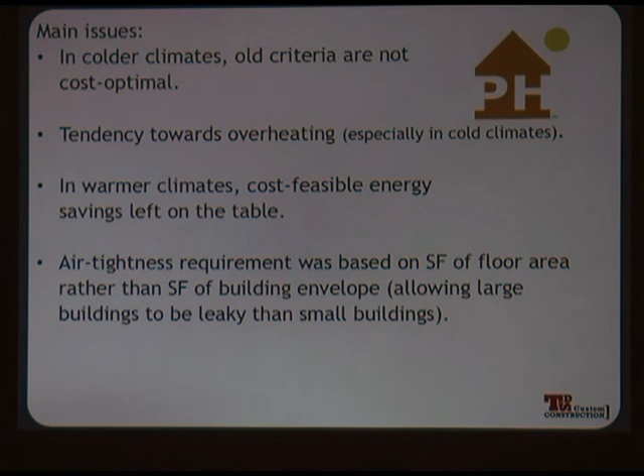Now they've evened that out so it makes more sense. The primary energy calculation used to be based on square footage instead of fair share. So a 5,000 square foot house with 2 people was rated the same as a 5,000 square foot house with 6 people. Now it's based on per person, looking at it on a global level, at what is the fair share principle, what amount of energy should we all be allotted.

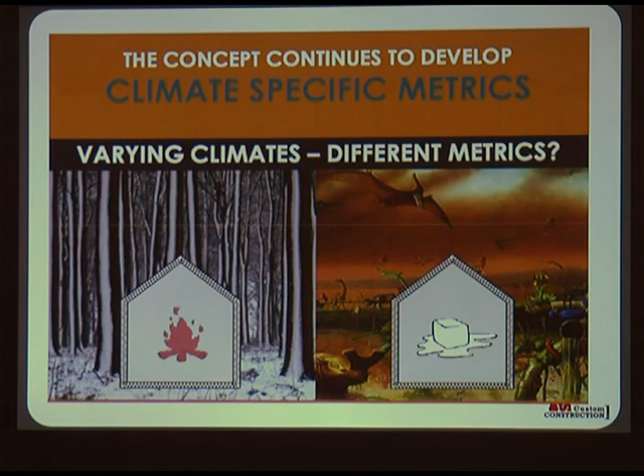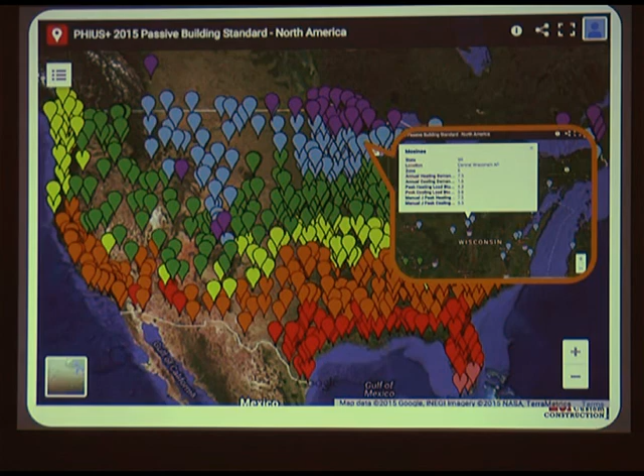There are a few other things that have changed, but I'll zip through this. They now allow some PV to be calculated into the equation, which I already talked about. You can check this on their website. It shows all the different criteria for tons of different sites around the country. I think our closest one is Sturgeon Bay, a little dot on there. Oh, that's right, we do have one. It's probably not on here, but Verge has it.

So basically, all you really need to know is that the requirement for heating loads and cooling loads is related to where you are in the country.

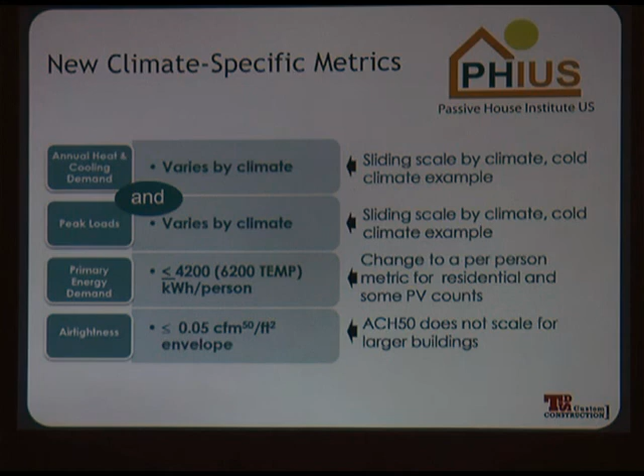Something to keep in mind when thinking about costs: if you're looking at it from a purely cost perspective, the levels of insulation we're seeing in passive houses, even with the new standard, may be a bit more than what's considered cost optimal. If I'm thinking in terms of cost optimization and want to get to zero, I'd increase insulation to a certain point where spending more wouldn't give as much benefit, and it would make more sense to just put PV on the building. That's the optimal moment.

If you want Passive House certification, you have to be willing to go to the next level, what they call 'over the knee' because of that curve on the graph. The reason they push for that is resiliency. The further you go, the more resilient your building is, because they're thinking about the long-term energy future and the potential for power grids to go down, and how a building can swing through those outages.

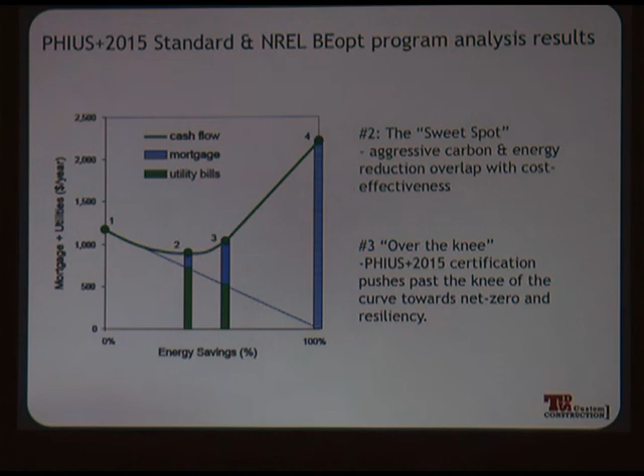That's not to say that anything at level 2 won't do pretty well, because it will. Our built-to-code houses won't do well, but level 2 will do well too. So there's a difference in philosophy between the cost-based sweet spot and what Passive House is trying to achieve with their certification.

I talked about this a bit already. If you get Passive House certification, you automatically get the Zero Energy Ready certification. You also need to do the Indoor Air Quality Plus program from the EPA, so you're getting a lot of certifications bundled together. You also work with a ResNet rater, the people who give you a HERS rating, which is really handy because you can compare it to others and put it on a mortgage sheet or a sell sheet.

People sort of understand that idea. So...

The other thing you're getting out of Passive House certification is site inspections and quality control. If you're certifying through a different body, I'm pretty sure they're still not doing quality control inspections like the Passive House Institute US does. PHIUS, with the rollout of their new certification system in 2015, asked how do we know people are building the way they said? Because it's not just about energy, it's also about quality and durability. So they introduced this part of the process, where people come out to your site and make sure you're doing what you said you were going to do.

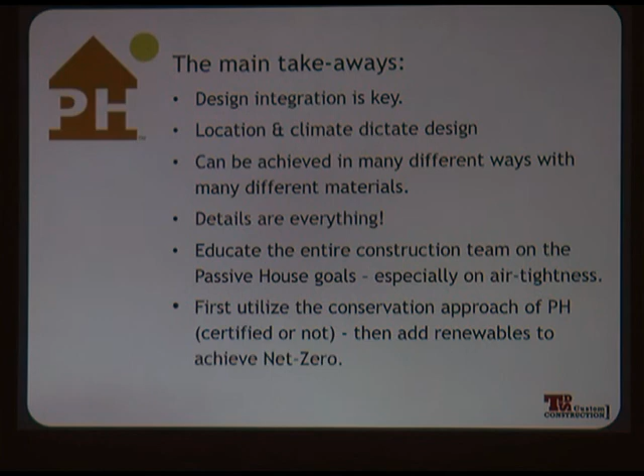The details are everything. Thinking through each place a wire might go through a wall, each connection where a window meets a wall, and how you're going to make sure that's air sealed. So the details are everything. Educating the construction team and having a lot of oversight and good communication. And these strategies are a conservation approach. Whether you're going to get certified or not, it's about using these strategies to conserve energy first, and then looking to renewables to get to net zero, which I think is really where we want to be. That's why I like these strategies, because they help me get to net zero. Go ahead. That kind of snuck in here, I think. But it's good to mention that the real return on investment is all of this stuff.

We're here because we're thinking about climate change, so it's about your personal ecological footprint. What can we each do personally to make a difference? All that comfort you get, no drafts and cold spots, no large temperature swings, healthy air, a quiet environment, peace, daylight, and views to the outside. Those are all things you really can't put a price on. And then, of course, resiliency to fluctuations, because weather is going to fluctuate, we just don't know what it's going to do. Energy prices are going to fluctuate, we have no idea what's going to happen. And then the power grid - we don't know if the capacity of the current power grid is going to carry us forward, or how long, and how we're going to have to improve that capacity over time, and if we're going to be able to keep up.

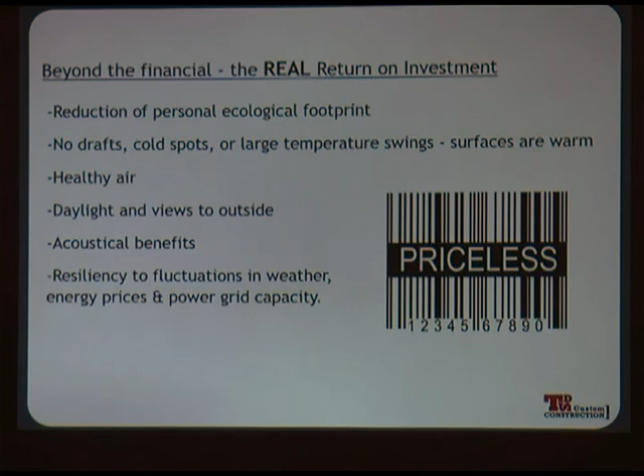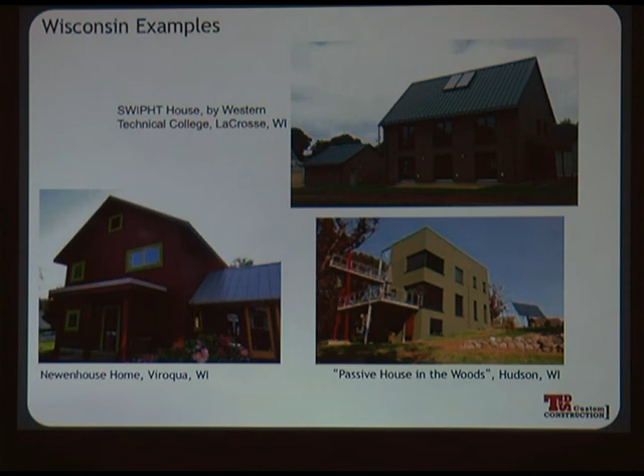You can go ahead. So there's a bunch of Wisconsin examples. Verge has some houses that I've heard you do tours of, and those are really good examples. There's some others in Wisconsin - these are the certified homes I know of. There's also one in Milwaukee that I forgot to put on here. The Newenhouse home in Viroqua - she does tours a lot, she's so friendly, you could just call her up and say, 'Hi, can I come visit your house?' The Passive House in the Woods was the first one, and they still do annual tours, I believe. And then there's the SWiPHT House by Western Technical College, partially built and designed by students, in La Crosse. So thank you.